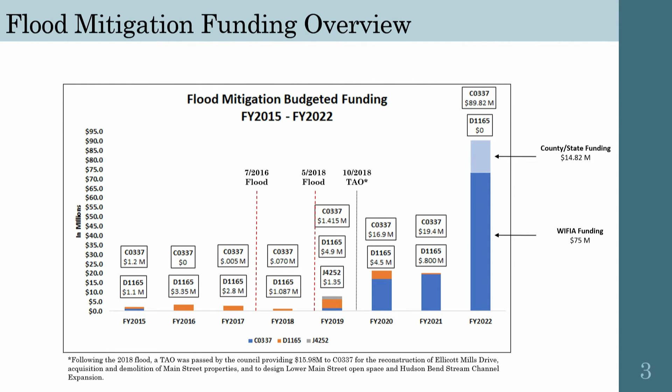The next slide is just a brief slide on WIFIA. We will have a table outside if you have any questions about how the financing works. But WIFIA, it's a $75 million loan from the Water Infrastructure Finance and Innovation Act of the Environmental Protection Agency. We currently have council authorization, so it's in our budget. And we have sent out a letter of intent to use the money to EPA, and we were told to submit an application for it.

So this is a very good sign. And we'll be submitting our application this September. And the anticipated loan closing is September of '22.

Now I'd like to talk about the Ellicott City Safe and Sound project specifically. And the first thing I'd like to do is, as a review, just do an overview of where these projects are. So what you see here on this exhibit is the area in the dotted line. That's the Tiber Hudson watershed, and the major north-south road is US 29, and the major east-west road is Route 40. The blue line at the very right of the exhibit that runs north to south, that's the Patapsco River.

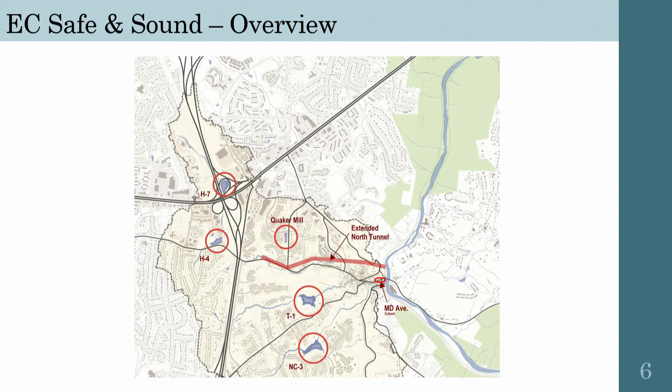Now, as far as project specifics go, just to update you on the extended north tunnel, the north tunnel is approximately a 15-foot diameter tunnel that will extend from the west end to the Patapsco River. We recently completed the feasibility of the extension of the north tunnel, and we selected a final design firm to take us to final design. We're currently finalizing the final design scope and fee, with a final design starting in September of this year.

And we currently released a solicitation for an owner's representative. And what an owner's representative will do is aid the county in reviewing the design documents and construction documents. They'll also provide quality control and quality assurance for the project as it moves forward. And we'll continue to engage CSX for feedback on our preliminary and final design for the North Tunnel.

The next steps we have here is we'll be soliciting for a construction team using a construction manager at risk contract method. This is important to note because this method allows for the contractor to be involved very early in the design and inform the designers on any constructability issues and associated costs. The advantages to the county of this method of contracting will be a better design, also to highlight or minimize unexpected conditions that might pop up, and to formulate a guaranteed maximum price for the construction of the tunnel.

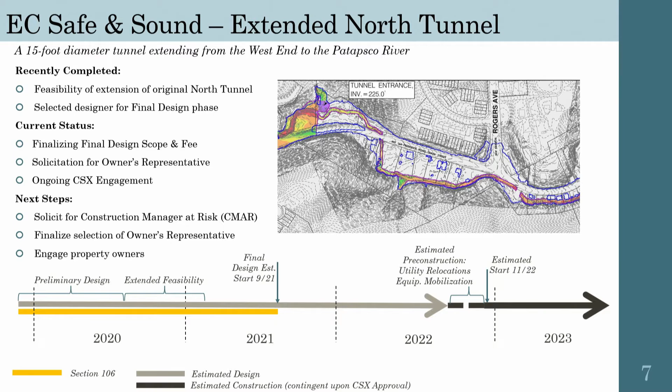This is the most likely alignment of the extended North Tunnel. You can see it starts in the 8800 block of Frederick Road and goes all the way down to the Patapsco River on the right-hand side. The lightly shaded green part on the right-hand side was the previous North Tunnel that was in our design, and the darker green represents the extended North Tunnel.

And as mentioned before, this is what allows us to really limit the impacts to the community. It'll be underground the whole time. It varies in how many feet below ground, but it's tens of feet to hundreds of feet below the ground.

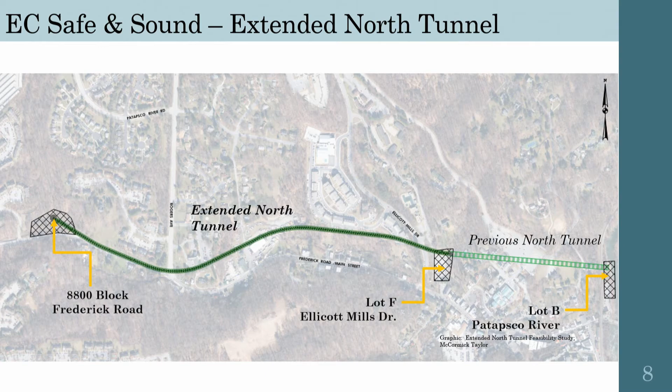The next project is H7, and this project has secured funding where we've completed the bid process to bring the contractor on. We have the contractor on board, we've issued a notice to proceed, and currently this project is under construction. So this is our first project under construction. We're very excited about this one.

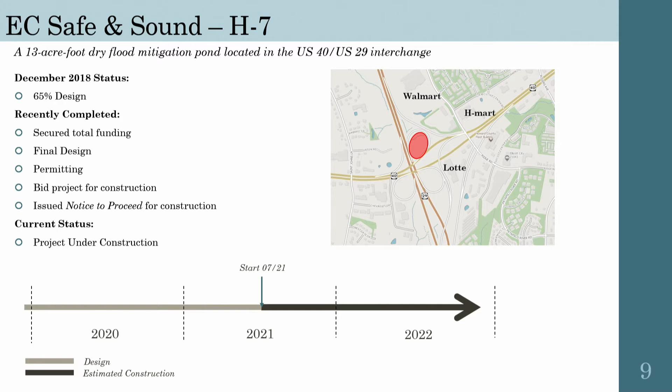Quaker Mill is a 10-acre-foot dry flood mitigation pond located off of Rogers Avenue, and this is in final design. Recently, final design, acquisition, and construction documents are complete. We're currently awaiting regulatory approvals.

Since we're getting state funding for this project, once we have the contract documents done, which we do, then we get on the agenda of the State Board of Public Works, which consists of the governor and a few others. They approve the project, and then the money is released and we can start construction.

So our next steps here will be to get the bid package out for the contractor this August. We're going to take it to the Public Works Board, which is scheduled, and then we'll begin construction. We're expecting to begin construction in January of '22.

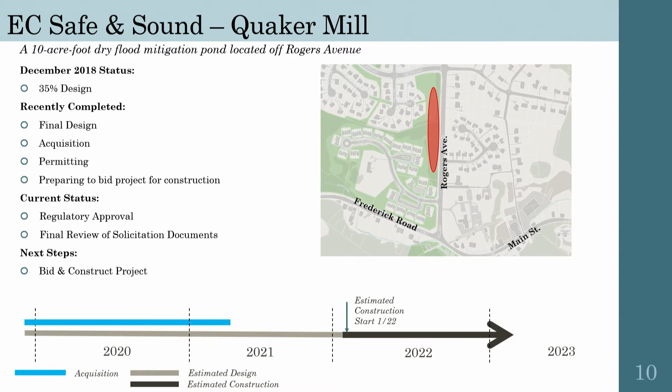Maryland Avenue Culverts is a series of pipes that will be installed under Maryland Avenue connecting the Tiber Hudson to the Patapsco River. We recently received Historic Preservation Commission conditional approval and have secured the funding for this project. We are currently at approximately 90% design review complete and have engaged CSX for their feedback on our designs.

We will be issuing a solicitation for the construction team within the next month through a construction manager at risk contract, like I explained for the North Tunnel. We anticipate we'll be bringing on that team in the early winter of 2022. We'll be completing the final design and permitting with construction beginning in late 2022, and that's contingent on CSX approvals.

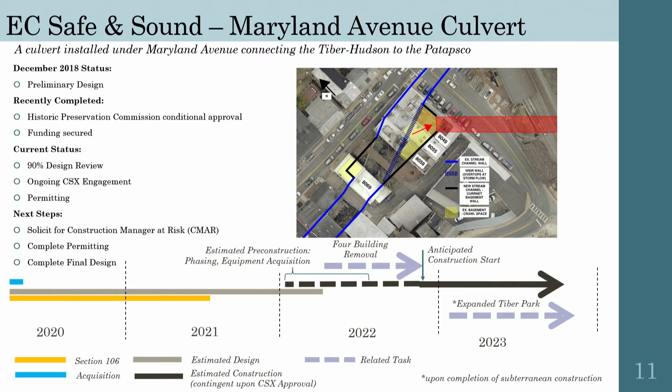Next project is NC3, a 63-acre dry flood mitigation pond located on the Autumn Branch in the New Cut watershed. We've recently completed concept drawings for this, and those design concepts are currently under regulatory review. And when I say regulatory review, I just want to take the opportunity to explain, because there are a lot of moving pieces and many review agencies in the whole workflow for all of these.

Once we get a concept together, we send it over to the Maryland Department of the Environment, specifically the Dam Safety Division. They review it and provide their feedback as to the suitability of the pond, what its hazard classification is going to be, and whether our design concepts are adequate or need to be supplemented with other things.

We are engaging with the property owners, and for the next steps, we'll be moving with the approved concepts into a preliminary design and finalizing acquisitions. We anticipate acquisition funding in July of 2022 and construction funding in July of 2023.

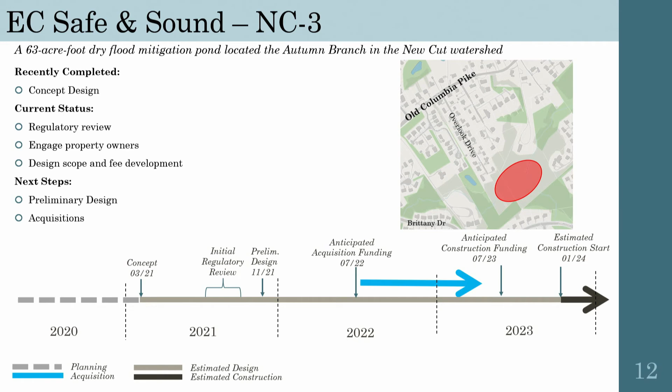The next project is H4, a 15.6 acre-foot dry flood mitigation pond, and like I said before, it's right off of Frederick Road on the west side of 29. This project is fully funded with the help of our state delegation securing the funds for us.

Similarly, we've recently completed concept designs, and the designs are currently under review with the regulatory agencies. The next steps will be for us to move to an approved design concept and then into preliminary design. We estimate preliminary design will begin this September, and construction may begin in early 2023.

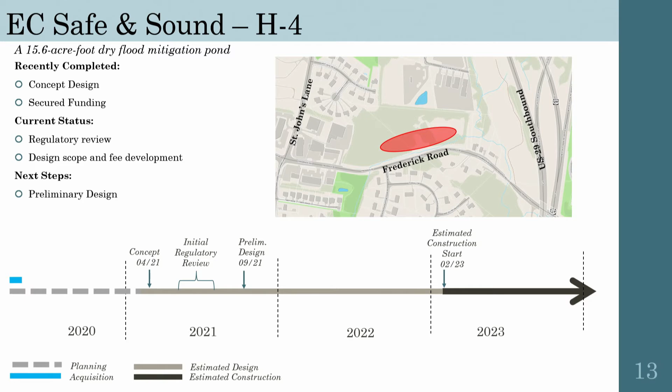T1 is a 70-acre foot dry flood mitigation pond located on a Tiber tributary. And we continue to analyze a potential delivery method for this project. It's a large pond, and so we're looking at different methods of contracting, and one of them is to consider a public-private partnership, as well as some other more traditional ways to design and construct this. So the funding is anticipated in July of 2022.

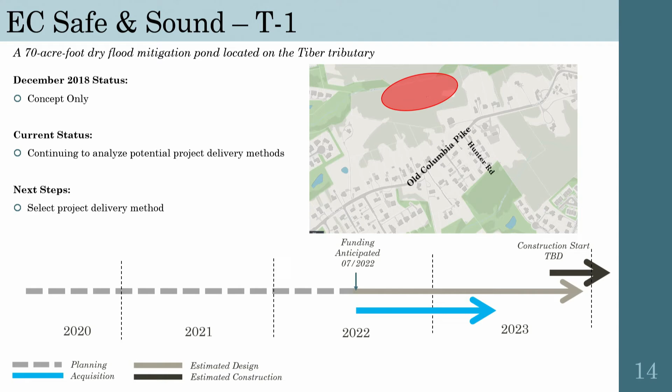So what I'd like to do now is call up Zach Hollenbeck to talk about the associated projects on Main Street. Thank you, Mark. Good evening, everybody. I'll go through some of the associated projects that we're working on, and so these are projects that will work in conjunction with some of the EC Safe and Sound projects that Mark mentioned earlier.

So the first of those is the six building partial removal project, which I'm sure you all have seen under construction over the past year or so. And so the work that we completed recently on this was the removal of the rear portion of the Caplan's building and stabilization of the Caplan's building, which was in danger of collapse when the county acquired it, which you see the image of here.

With the other remaining buildings, we've engaged a design team earlier this year to develop a code and use study that's analyzing how we can use these buildings either as individual buildings or collectively, and what are the building code implications of doing so, so that the county can determine how best to use them. Our next step in that process will be engaging the project advisory team that was announced earlier this year, which is a group of local and subject matter experts. We'll be reviewing that code and use study with them in the near future.

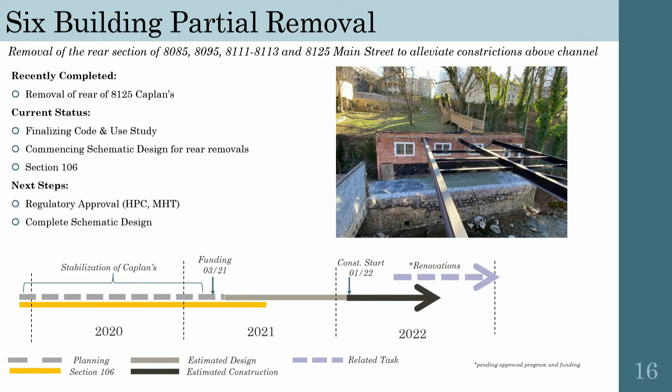We're also concurrently working to advance the schematic design for the rear removal of the remaining buildings, that would be 8085, 95, and 8111, 8113. We're working through the Section 106 process, which I'll expand upon in just a little bit. So once we get through the schematic design process, we'll be seeking regulatory approval from the county's HPC, Historic Preservation Commission, and the Maryland Historical Trust in order to facilitate an early design package in the spring of 2022.

With the 4 building removal effort, these are removing the 4 buildings between Maryland Avenue and Tiber Alley. Earlier this year, we received conditional approval from the county's Historic Preservation Commission for this removal effort. We completed the final design effort for these 4 buildings, which annotated components of the buildings that will be salvaged, character-defining elements that we'll be salvaging for future reuse in Ellicott City. We also completed a hazardous material assessment of the buildings.

We're currently engaged with one of our on-call contractors looking at some pre-construction services for phasing and logistics around the site, as well as developing an accurate bid package. And again, the Section 106, which I'll expand upon. So our next steps in this, at the conclusion of the Section 106, we'll seek MHT, Maryland Historical Trust, regulatory approval so that we can commence construction. And the conditional approval from the Historic Preservation Commission is conditioned on approval of the Maryland Avenue Culvert crossing from CSX. So we're continuing to engage CSX and work through that as part of the Maryland Avenue Culvert project.

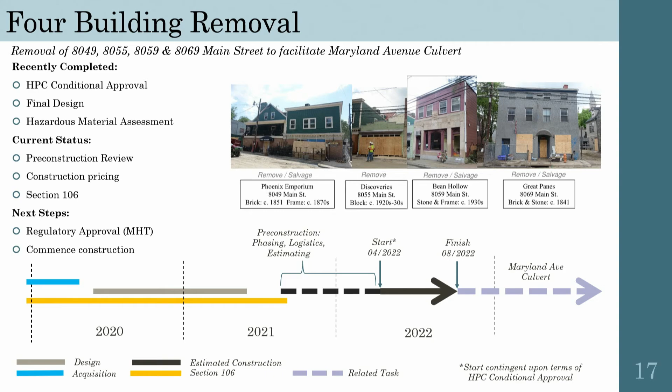So the Section 106 process that I spoke to a couple moments ago is associated with identifying historic and cultural resources in the watershed and then working through mitigating any potential adverse effects on those resources. There are 4 projects that are associated with the Section 106 review, and that's the extended North Tunnel, the Maryland Avenue Culvert, the 4 building removal, and the 6 building partial removal that I mentioned.

We recently completed an engagement process with our consulting parties on this and a second consulting party meeting, and we've completed a review of our draft programmatic agreement, which will guide the implementing actions that the county needs to take upon signature of that programmatic agreement. That'll be circulated for signature in the very near future, meaning that we've completed the Section 106 process. Now, while we've completed that process, that develops the programmatic agreement, as I mentioned, there's a number of things in there that we'll need to do before we begin implementing the projects and throughout the life cycle of the projects.

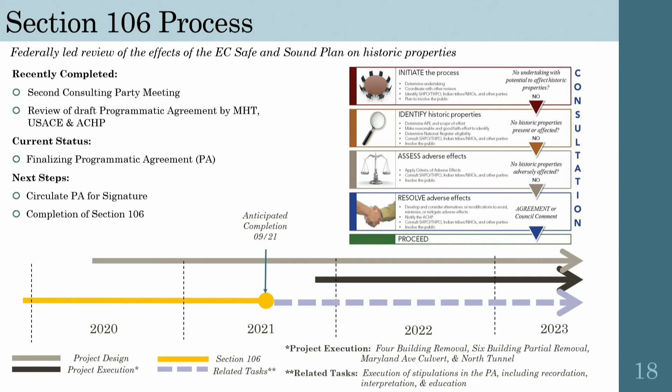So the Tiber Park expansion is the activated pedestrian area that we envision after removal of the 4 buildings, implementation of the Maryland Avenue Culvert, and the associated water conveyance. This area, the final treatment for this area is prescribed in the Ellicott City Watershed Master Plan.

We've recently issued an expression of interest to solicit site and landscape design firms, not just for this project, but for the entire Ellicott City area. And that solicitation is available now, and so our next steps will be gathering responses to that solicitation and evaluating those, and then developing a specific scope and design fee so that we can proceed with the design of this.

Our hope is, with the sequencing of these projects, that we work through and we develop a design so that we can begin construction and implementation of this project concurrent with the conclusion of the Maryland Avenue Culvert.

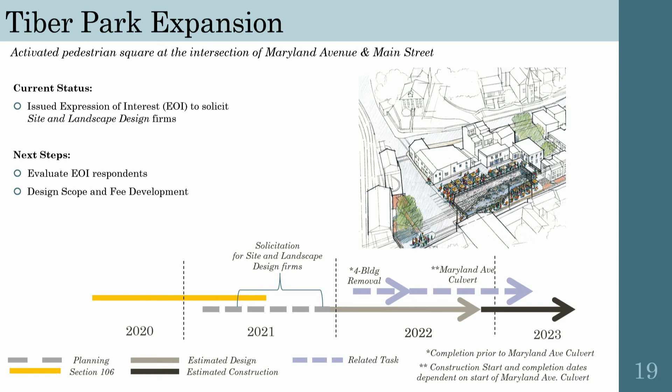We've also recently completed a sediment study to ascertain the potential accumulation of sediment within the Tiber-Hudson stream channel network. So in order to do that, we did a series of field investigations that included test pit excavations and use of some other equipment to determine the depth of sediment and the depth of rock within the stream channel. And we analyzed whether removing that material would be hydraulically beneficial. We looked at a primary area that was behind the back of Caplan's proceeding down towards Tiber Park, and then we expanded that to 3 other areas.

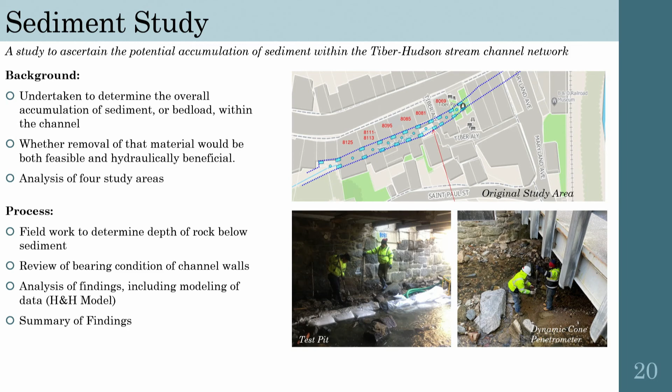So what we found is that, while there is sediment in the stream channel, which I'm sure that nobody would be surprised to hear, the analysis shows that removal of that sediment alone will not result in a meaningful increase in the flow capacity of the conveyance network. And so there's a couple things that are worth noting there. One is that during a storm event, that sediment is mobilized within the stream channel. So it is picked up by water and displaced and deposited in new and different areas. So even if we do remove it from one area, it may deposit itself in another area.

And so, as I mentioned earlier with the 6-building removal process, that project will remove the rear portion of the buildings, which are constrictions above the channel. That removal process will provide an appreciable increase in capacity of the channel.

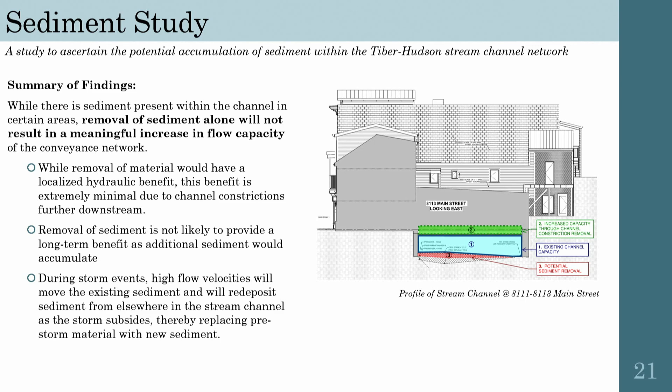So I'd now like to introduce our team who's here tonight. I'm going to be stationed out in the lobby after this. They'll be more than happy to take any questions that you all may have and any comments that you have on the projects. If I can ask everyone to stand up as I read you so you can associate a face with a project. At our North Tunnel project from McMillan Jacobs Associates, which is our final design firm, we have Dave Corkum. There's Dave, excellent, and Mark DeLuca, who you met earlier tonight.

For the Maryland Avenue Culvert, the Maryland Avenue Culvert and Sediment Station will be jointly located. We have Andy McLean with McCormick Taylor, who's the lead engineer, Brian Cleary from the Department of Public Works, Environmental Services, and myself, who you met earlier. For our buildings and Tiber Park Station, we're joined by Chelsea Dell from SGH, who is our structural engineering consultant, who's been integral in the preservation of Caplan's, as well as some of our other flood-proofing strategies. We're joined by Sharon Walsh from the Bureau of Facilities, and Bob Lins from Rec and Parks. For Quaker Mill, at the Quaker Mill Station will be Mark Richmond from the Bureau of Environmental Services.

The H7 and NC3 projects will be Greg Adolph from McCormick Taylor and Avinash Dewani from the Department of Public Works Environmental Services. For those of you who might be interested in learning more about the WIFIA process, we're joined by Zach Carson from Rebel, which is one of the county's financial advisors, as well as Rafu Aguile and John Vu from the Department of Finance. And then last but not least, the H4 and T1 projects, Ryan Thomas with Century Engineering, Michelle Monti from the Department of Public Works Environmental Services.